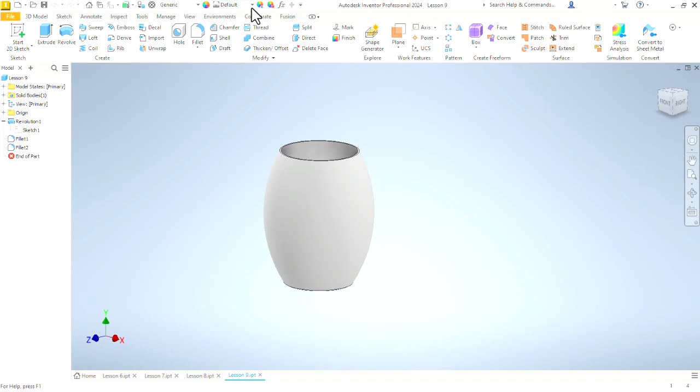Welcome to Lesson 9. In today's lesson, we are going to work on this shape, sort of a curved vase shape. Let me make it clear so we can see inside, see the shapes we're dealing with. We will use the Revolve feature again, as we have in a couple of the previous lessons. I want to back up and look at those.

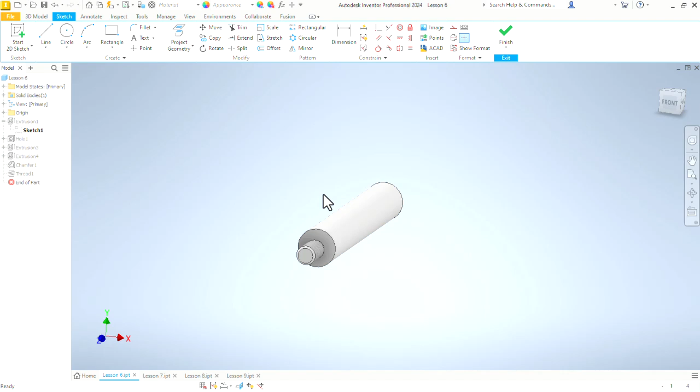Let's actually go back to Lesson 6. We made this round shape. And we did this with a series of circular sketches and extrusions. Draw a circle, extrude it, finish that one. We put a hole on the back end. We draw another circle here. We extrude that. And through creating solids and then cutting away a little bit right here for this undercut, we created that round shape.

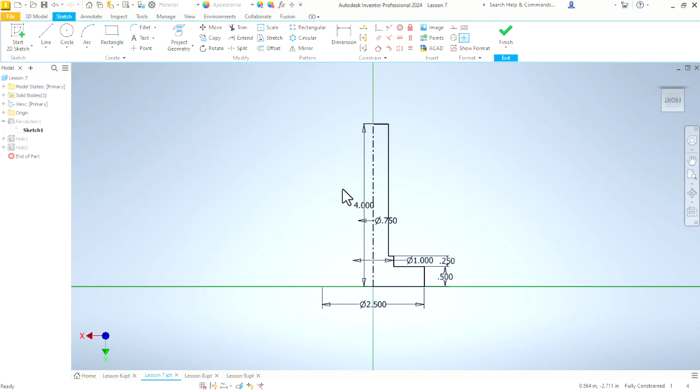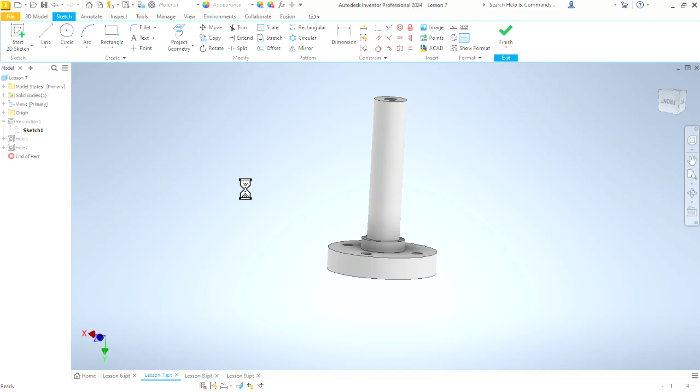When we got to Lesson 7, we made another round part, but this time we used the Revolve feature and created a revolution. We made this all in one sketch. Remember, that is a center line, that long dash, short dash. That is a center line so that as we create dimensions around that center line, if we dimension from center line to outside edge, it creates that diameter dimension that we want to know that we have that full diameter on our part. This part could have been done with a circular sketch and an extrusion, another circle sketch and an extrusion, and another.

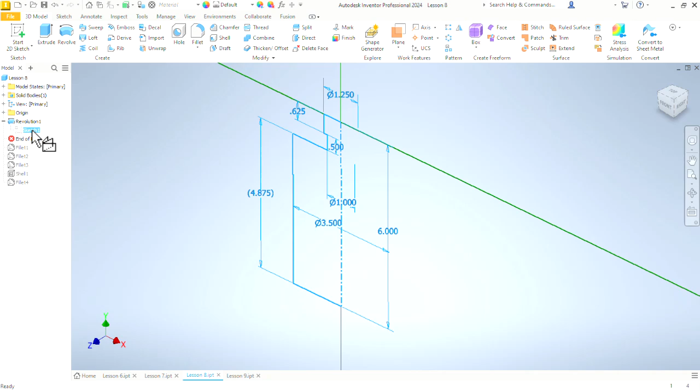Lesson 8 was similar. If we get rid of all of these fillets and the shell where we hollowed it out, again, we did use the center line and we revolved that feature. But this one as well could have been done with a circle and an extrusion, another circle, an extrusion, and so on. Then we added the fillets to round off the corners, did a shell to make it hollow, and finally a little fillet at the top.

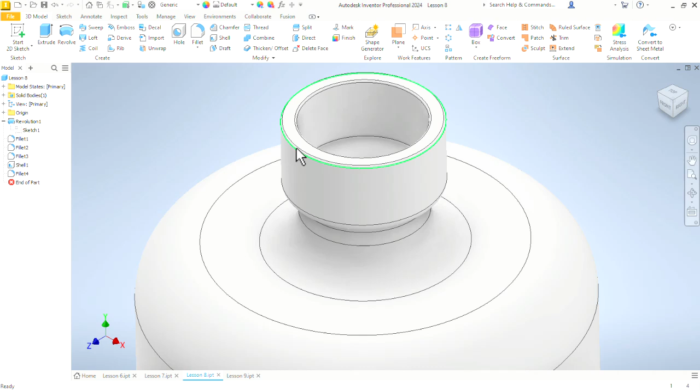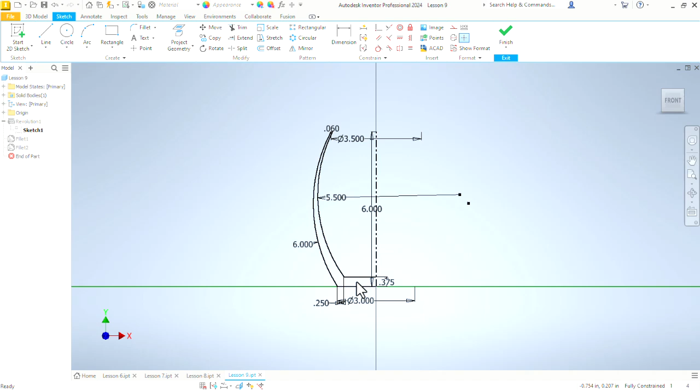Lesson 9, this shape would not lend itself as well to drawing circles and extruding. We see the curve that it has here. Now, if we look at the sketch that I used to create it, we have a couple of arcs, we have a center line, we have the two horizontal lines that make our flat base, and then we have this little top edge here. Attempt to recreate this part.

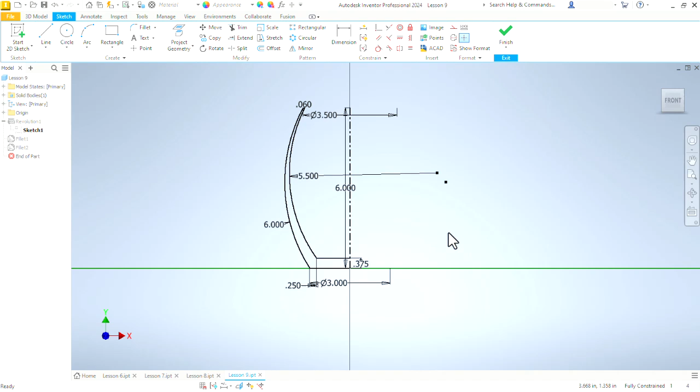I don't want to just go through this dimension by dimension and copy it exactly. I want to start from scratch, knowing what it is that we want to create. I want to make a new part, start from scratch, and see how we would go about kind of organically creating this as we work through the shape. We'll start again, as usual, start a new 2D sketch on the XY plane.

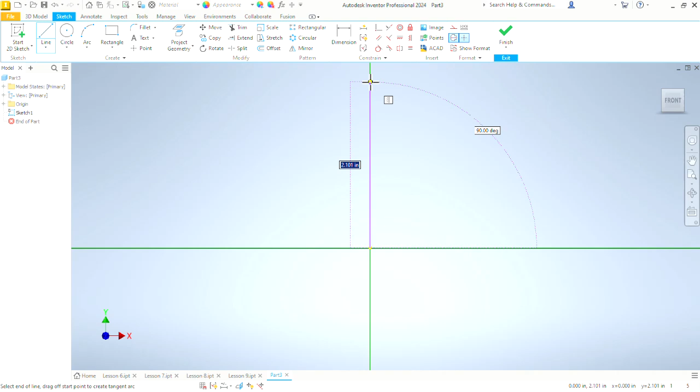What I do know that I want to start with is a center line, so we'll start by sketching a line. We will tell Inventor that it is to be a center line. We will start at the origin, take it straight up, finish that line. We'll zoom out a little bit and make it 6 inches tall. Now that we have set the height, let's create another line, turn off center line. We're done with that. Come down to the bottom, and we will draw a horizontal line that we want to become the base of the vase.

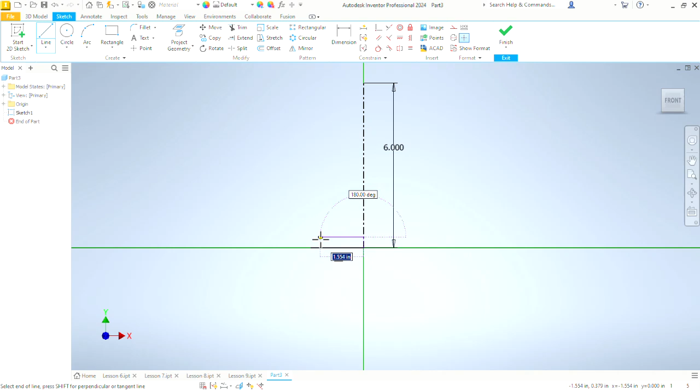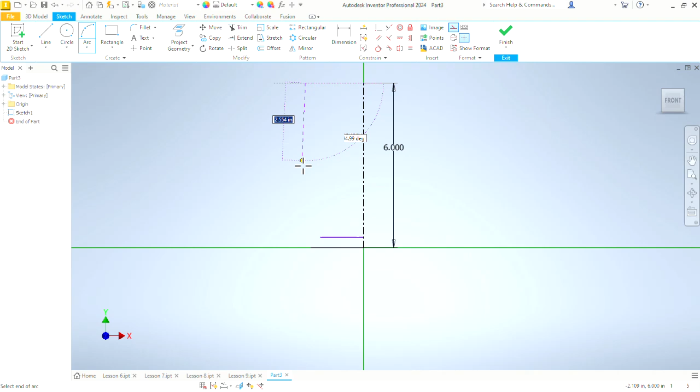Let's create another horizontal line that will be the inside. And then up here at the top, let's make a construction line that we will use for the top edge of the vase. Now we need a couple of arcs to create the curved sides. Use the 3-point arc. With the 3-point arc, we define 2 endpoints, and then we create the curve. I realize that is still on construction geometry. We can fix that just by clicking the line, come up here, click that construction button to turn that off. So that gives us one curve.

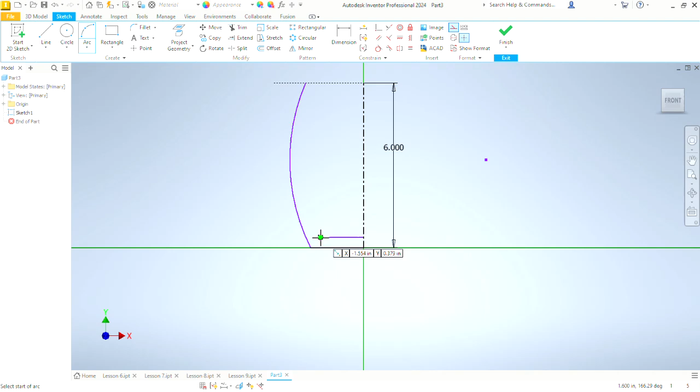Let's create, oops, not line, we need an arc. Create another arc, click on that inside bottom. Come up here to the top, I want a rather narrow rim at the top. And then sort of adjust that to get the shape that we want. Again, still on construction, I need to pay attention. Next time I create one, I need to come and turn that off. Now I won't be creating any more construction geometry as I go.

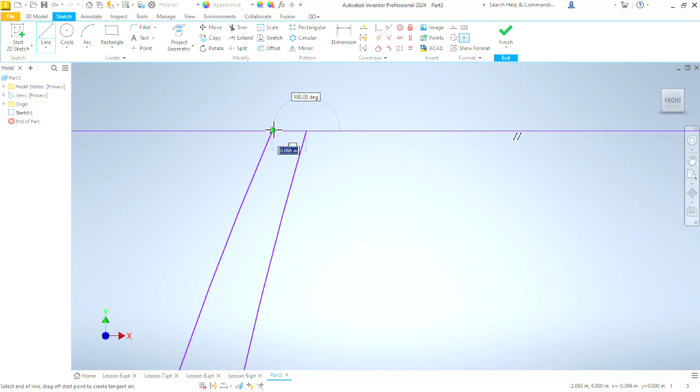I want to put in one more little feature. Let's add our line at the top to join those two ends. So that keeps it on that construction line, keeps our height set, but gives us the ability now to drag things around a little bit.

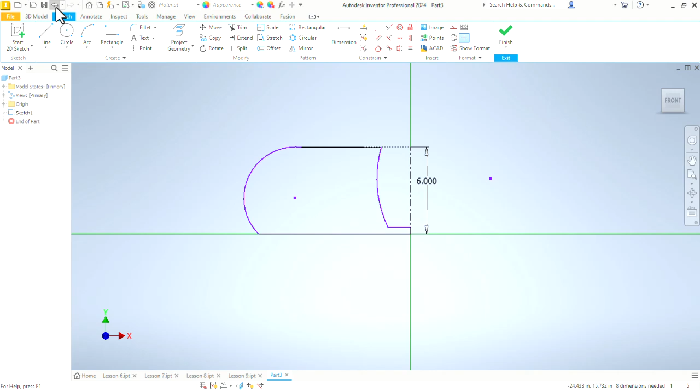Just a little warning, sometimes when you're dealing with arcs, things can go bad real fast, so we need to start getting dimensions on things as quickly as possible. The more of this that we start to drag around, things can act weird. So I want to undo that, get back to our basic shape.

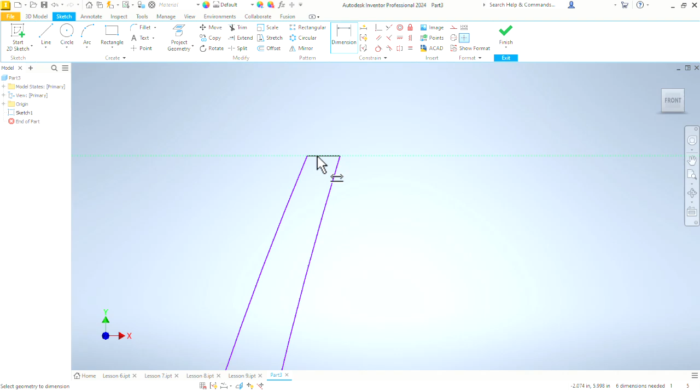Let's start by giving this bottom a thickness. Make that 3/8. We need to look now at things that can move. I want to keep these two bottom points a certain distance apart. We'll give that 1/4 inch. Again, all of these we could come back and adjust later and play with these numbers to get the effect that we're looking for. Let's give this a real skinny top. Let's make this 0.060, 60 thousandths.

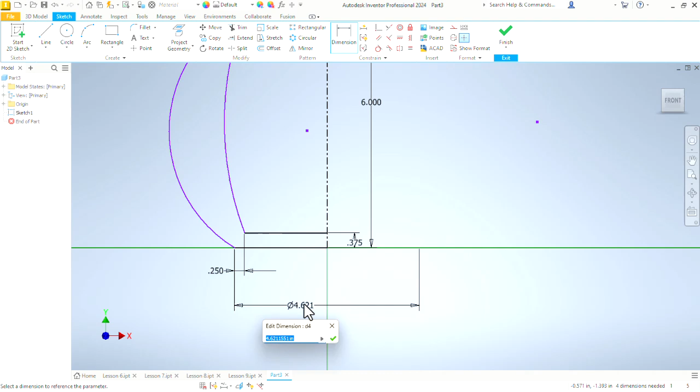Now we should be fairly well locked in place. Let's see what can move. Okay, realize the base of this needs a diameter. Let's give the base a diameter of 3 inches. We need to constrain the top. Let's make that be 3 inches as well for now. So the top and the bottom diameters for now are the same.

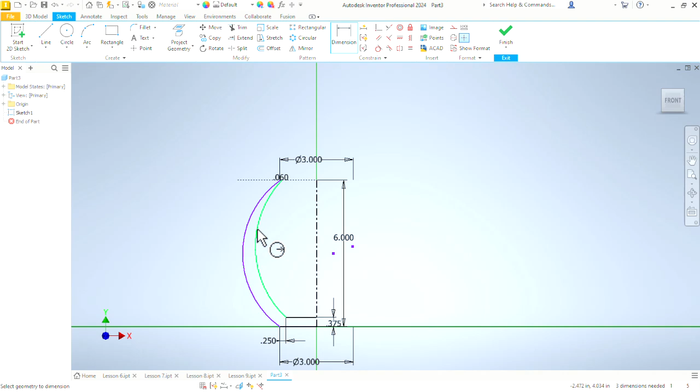So now I can still adjust the diameter or the radius of these arcs. Let's come in and put some dimensions on this. Let's make that 5 and make that 6. We're getting a little too thin up here in this area. Let's make that, let's see, 6.5. Maybe we need to go even bigger. 7. I see we're going the wrong way now. I need to shrink that down. 5.5. That gives us a little bit better curve.

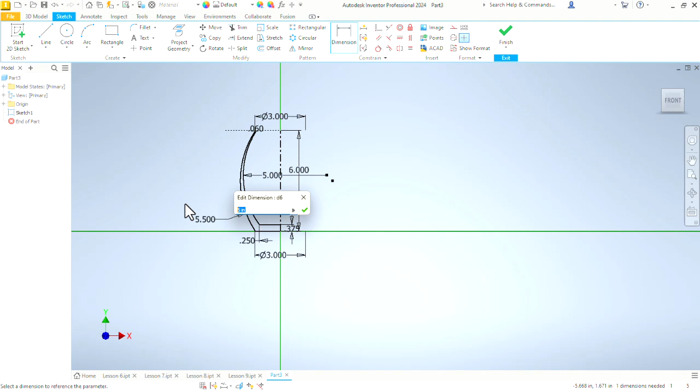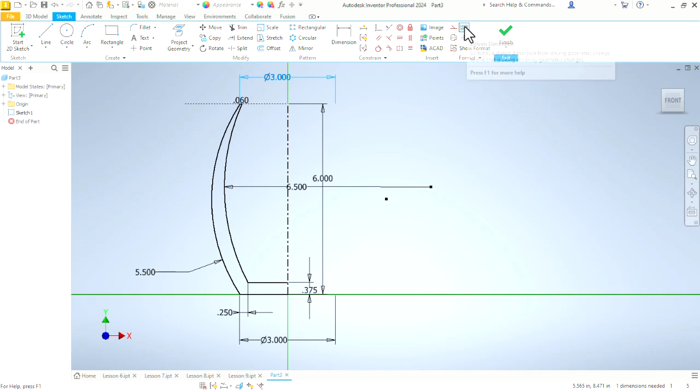Just look at what happens: as this inside arc gets bigger and bigger, then that increases that wall thickness. One thing that we can do as we adjust this, as we want to play with some of the numbers, finish our dimension mode, click on this one and make it a driven dimension. Puts it in parentheses, and that means we can come up here and we can drag some of these things around, and we can make it be any shape that we want. See, that took it down to 2.5 inches, 3 1/4.

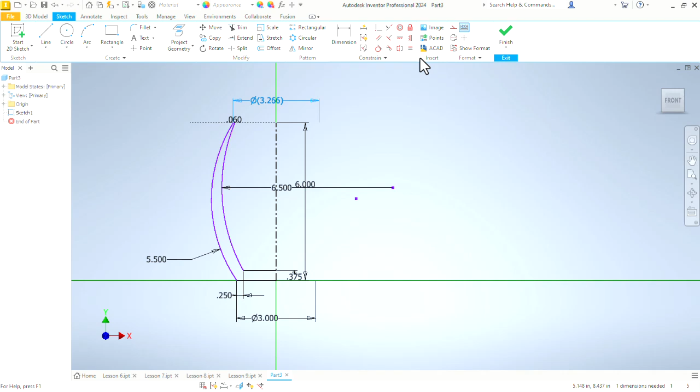Then if we decide we like the way that looks, we might want to make it exactly 3.25. Then we can lock it in place. I can do the same thing here. Make this 5.5 a driven dimension. Now I can drag it around a little bit. Notice with everything else constrained, things don't fly apart quite so bad. Maybe I like the look of that wall right there. About 5.833 is where it landed.

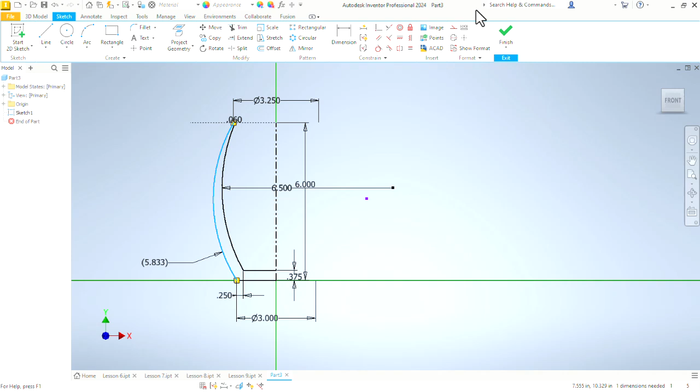Let's click on that. Turn off driven dimension. Let's make it a little bit nicer, round number, 5.875, which is 5 7/8. Again, we can always come back, change these dimensions, not a big deal, but let's finish this sketch.

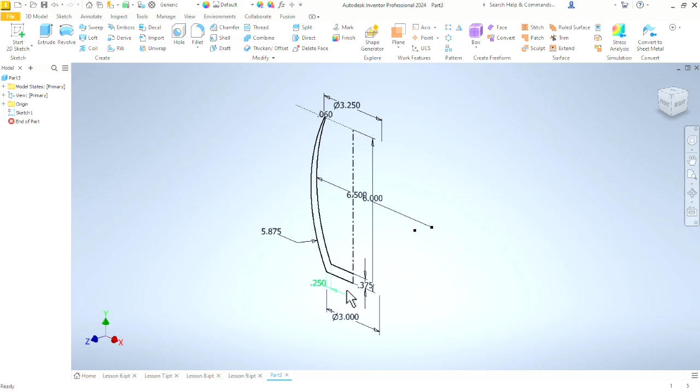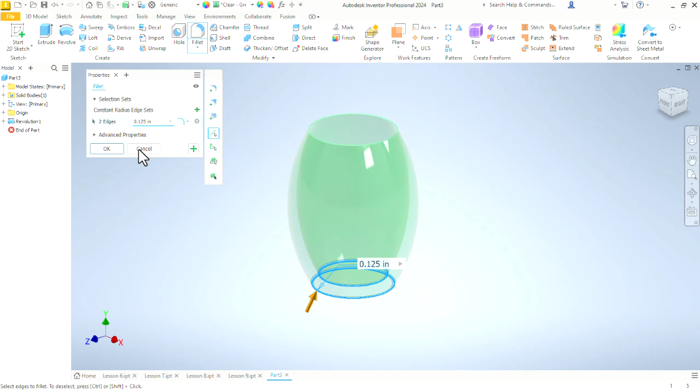Zoom back out. Revolve this feature, automatically selects our center line. Say OK. Come up here to the top. This is our appearance. Let's scroll up to the clear. Let's make this one green. We might want to add just a little bit more smoothing here. Let's add an 1/8 inch radius down there. And there we have our vase.

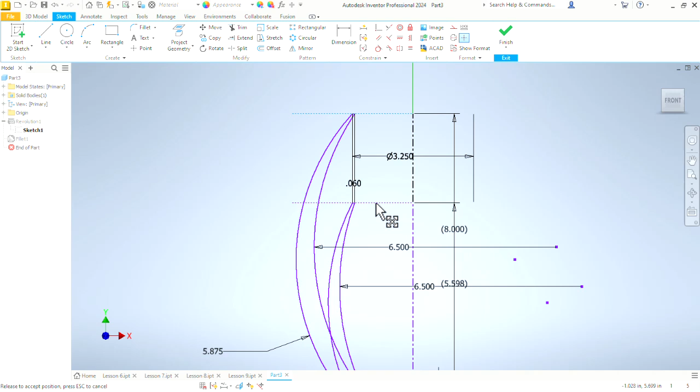Now that we have it, we can see the shape. We can always come back, edit this sketch. Can make it shorter, make it taller, change this to a driven dimension, and see what I can drag around. Drag that top line up and down. Play with all the numbers until we get a shape that we like. We are free to do whatever we want with it.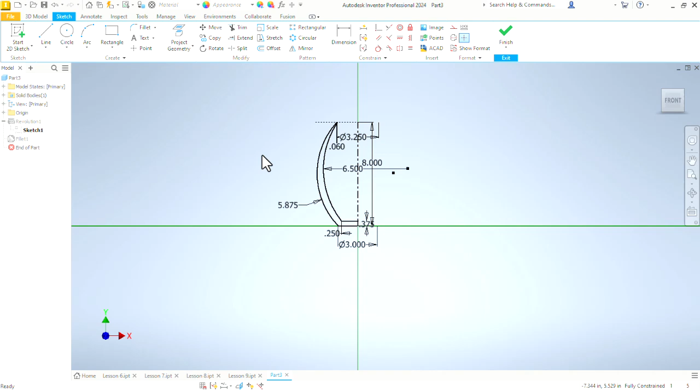But when you're done, turn off the driven dimensions. If you want to make it more round numbers, we can do that. Finish sketch, and there it adjusts. And we're going to call that one done for lesson 9.

Come back for lesson 10. We're going to use Revolve again, but add a few more techniques as well to continue building on what we have learned, but to continue to grow your knowledge and skills as you progress with Inventor.